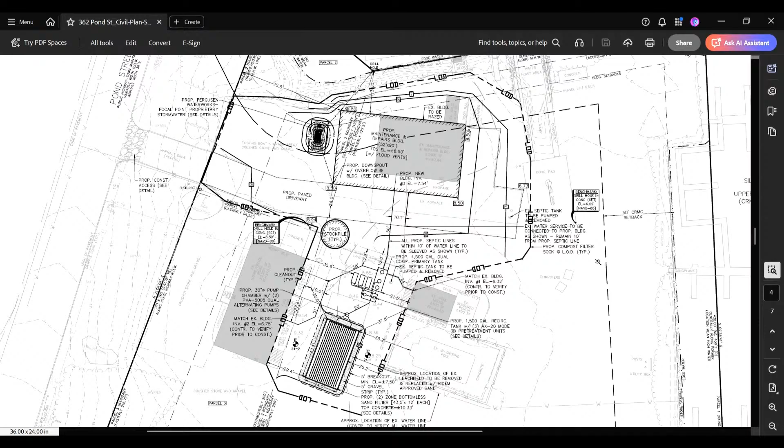Prior to this submission that you have before you, Safe Harbor had proposed a 15,000 square foot building to contain this exact use, much larger building that was located to the south of this parcel near those residential homes. As a concession to the neighbors and being sensitive to their concerns, that project was scrapped in favor of a much more modest, smaller building in the existing location as far north as possible away from the residences. It wasn't until today that I received a letter asking for some buffering and screening with respect to his property.

I leave it to the board to listen to those comments. I don't want to speak for Mr. Pastore, but again, I would just say that this is an existing commercial marina operation that's a by-right use.

The marina operation - Mr. Pastore had acquired his property knowing very well that there's boat storage on the property. He only purchased it within the last couple of years. The boat storage aspect isn't being modified or changed in any way. The existing boat storage locations on site are staying as they are. We've clearly identified those on a site utilization plan at the request of staff. But again, the boat storage aspect is really not subject to this application.

It's really just the building itself, and my clients have done everything in their power to move this as far away as possible, and certainly won't impede or impair anything regarding the neighbors' properties. Again, the boat storage is an existing condition that has been there for many, many years.

So with that, we have the full team here. I do have two supplemental exhibits I sent to planning staff today. It's really just an aerial of the site - there are four pages, but it superimposed the proposed building on it. It gives you a good perspective for where the building is and the aerial views from the existing conditions. I also have a sheet set of the elevations and conceptuals of the building. I believe I handed those out to you at the last meeting and they're in your package, but I do have additional photographs - they're unchanged from last time, but again, just for everyone's perspective, and those may be helpful for the board's review.

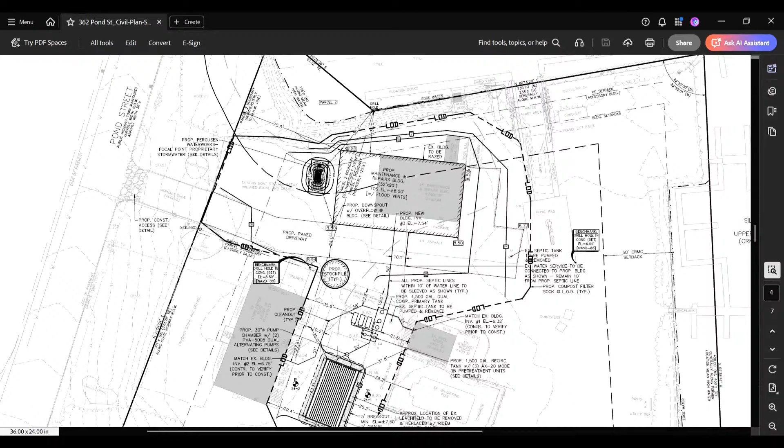No, this is a proprietary system. It's called a rain garden - it's proprietary by Ferguson, and its name is Focal Point. So it's a planted, vegetated, shallow retention system with filters beneath it. What you'll see on the surface is a 1-foot deep shallow depression full of plantings. Thank you very much. You're welcome.

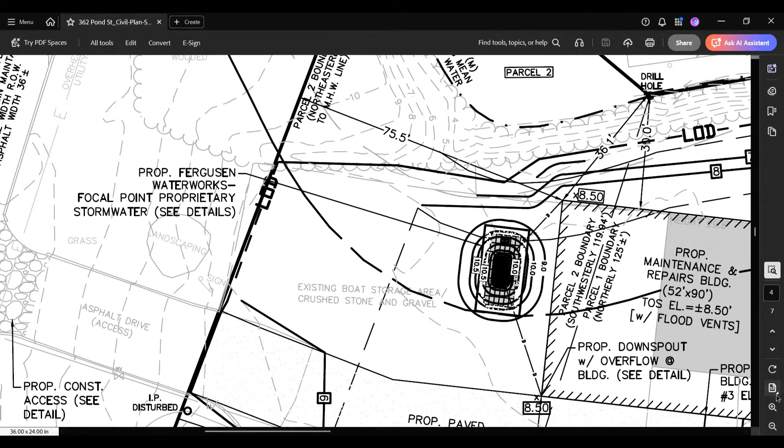Is there any external storage of any type of fuels or hydrocarbons? Not that I'm aware of, but I can defer to Chris on that. I don't believe so, no. So any fuels, I mean, you must have some fuels on site, they're gonna be kept in the building, or?

You don't have a hazardous material locker outside, or? Alex is the general manager of the Safe Harbor site, so he can speak to that. Alex? Just state your name for the record. My name's Alex O'Coin. I'm the general manager of the property.

What we have on site for waste fuels is a 20-foot shipping container for containment, and then within the container itself, there is a secondary containment underneath each vessel. We have waste oil or recycled oil. We also have waste fuel.

Is that in the building, or? No, that's external. That's external currently, and it will remain external. And is it a tank, or what is it?

There are 55-gallon drums for waste fuel. There is a 250 or 275-gallon recycled oil container. Is there overhead, or is there a secondary containment around that? It's inside of a shipping container, and then there's also drip containers underneath them as well.

Okay, and then how about fuel? You must have some heating fuel, either diesel fuel, gasoline, whatever it is that you need to test and run motors? Yep, currently that's all stored within that shipping container, so it's a watertight container. It's actually triple contained.

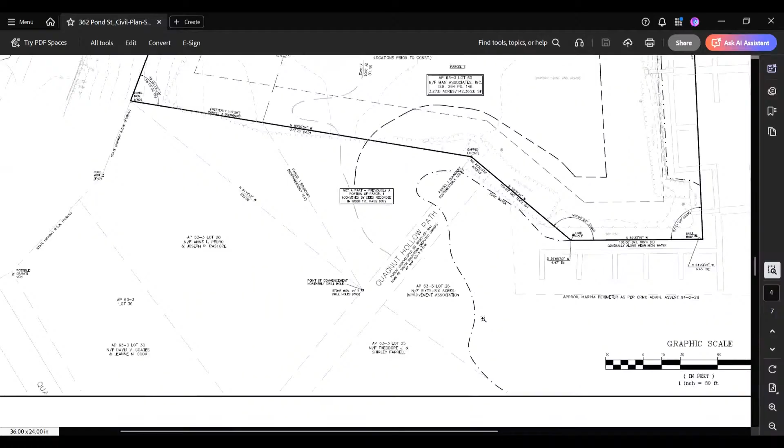It's a 20-foot shipping container. Madam Chair, it's shown on sheet 2 of the civil design plans, existing conditions, to the northeast corner of the existing building.

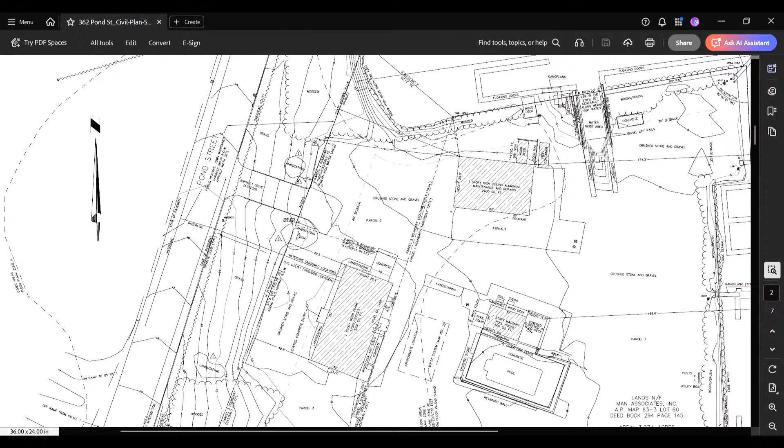Between the building and the ramp, no, farther up to the northeast, a little more east. Directly south of that small deck there, and directly left of the site container, or steel container. That's where all of our waste accumulation center is.

And that location is planned to be permanent? Yes, that's going to stay there. I think it's sheet 1 of 2. Sheet 1 of 2. I think so. I don't know.

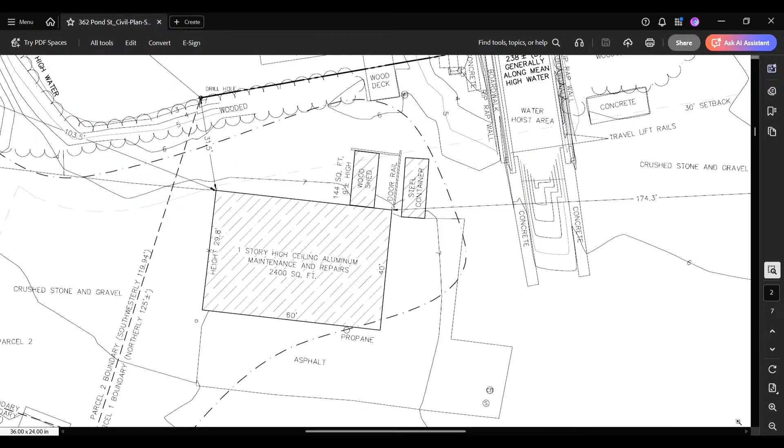Other questions? I have one more. Susan? So thank you for explaining your stormwater system to me.

Is there somewhere on one of these plans that it shows you're planting this as a rain garden design? It does, but I can't see on the plans where that's indicated. It's not on there; we refer to the proprietary system that was designed by others, and I do have a single sheet of that, which I'm happy to pass around.

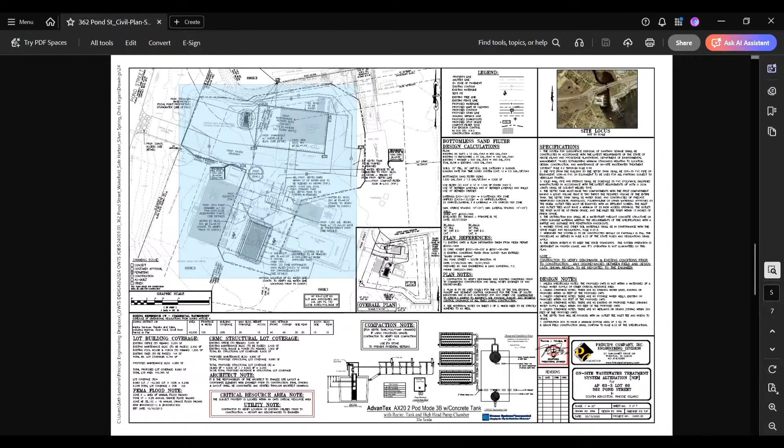Is that part of the packet we've been given? That was not part of the packet you were given, no. I feel like that should be part of this packet, just for the permanent record, so we have information on that proprietary system you're planning to use on site. Okay, I'll include that. Thank you.

Interesting that somebody got some kind of trademark and called it a rain garden. That's not the term for it. They call this a focal point, and they call it a high-performance modular bioretention system, to be complex about it, but more or less it's a rain garden.

So furthering that, it would be good to know what's being planted, how that's being done, and how that system works. Would be useful for us. Thank you. Is that generic for anywhere, or is it specific to our zone and growing conditions, which I would think it would be? Yeah, it's specific - the plantings are specific to this zone. Great.

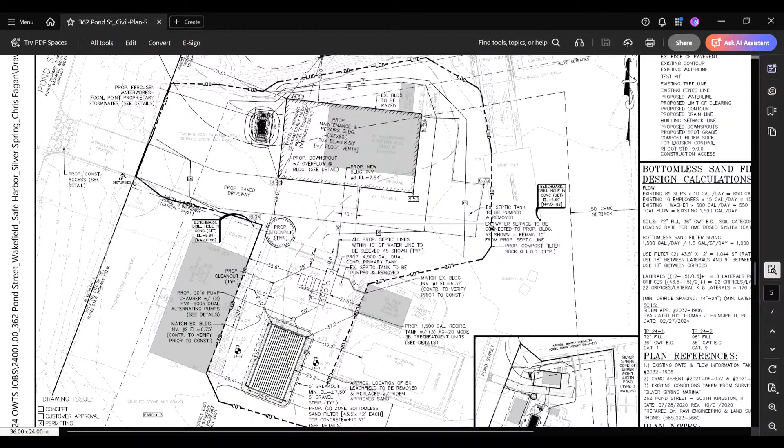Anything else from board members? I just want to go back to the shipping container. So you talked about the shipping container having triple containment. What is the maximum volume you maintain with that triple containment? There's two 55-gallon drums for waste gasoline, and there's a 250-gallon oil recycling tank for regular.

My question is more relative to the containment and design of the containment than what you actually have there. What I'm trying to get at is what is the maximum you could have inside that trailer before that containment overflows. And I can tell you where I'm going with this - I'm going to ask that there be a condition of approval as far as the maximum amount you can store, knowing that amount still stays within the containment, and also that the size be found to be a significant part of this plan, so that if you have to change that, you'd have to get approval from the administrative officer.

But what I'm trying to get at is the containment with the shipping container - what is the max that can be inside that shipping container before you would violate that containment? Typically, I think on the containment you'd probably need at least 110% of the volume that's stored, if I'm correct. I don't have the exact number ready for you, but I can look into that and get back to you.

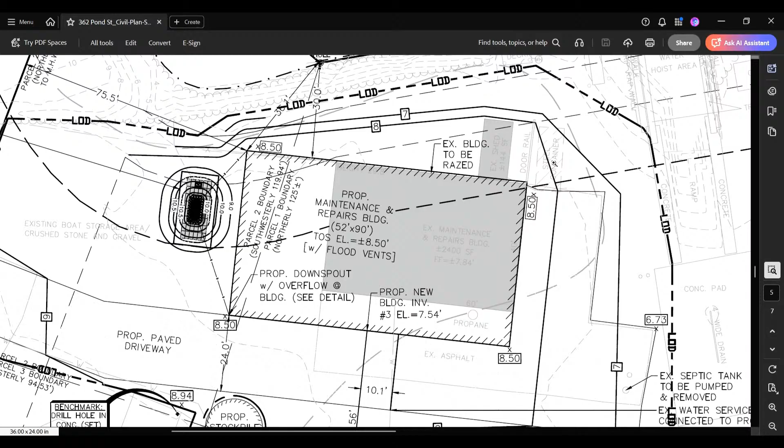Madam Chair, if I may, just to back up to the question about spill prevention, there are particular regulations in a spill prevention plan that Safe Harbor Marina has to adhere to. Beck Bennett, I'm going to ask him to comment briefly on it. I think it would benefit the board to understand how that works and what that plan is.

Hi, Beck Bennett, I'm VP of Construction and Development for Safe Harbor Marinas. I started out at the property level at Newport Shipyard in EHS, and I was responsible for handling a lot of the various chemicals and petroleum-based products we would produce. What we typically have at properties is what's called an SPCC, a Spill Prevention Control and Countermeasure Plan. That's all dictated - the containment and level of containment, volume you can keep on site, when you have to pump those things - is all clearly defined, and we have records of those.

Whenever we call a company like, for example, Western Oil comes down and takes a lot of those products, it's very closely regulated on what is going in and what is going out of the property and how that's controlled and contained. With the SPCC, that dictates how you go about handling spills, when you have to report a spill, and who it's reported to. Each property has those plans in place, and we also have an individual in that seat, and we can certainly provide literature to you on those processes, because it is very important to us.

I'm glad to hear that. But I probably would feel more confident - and nothing against staff here - if the person operating it knew what the maximum amount was, that they knew what the maximum amount that container was.